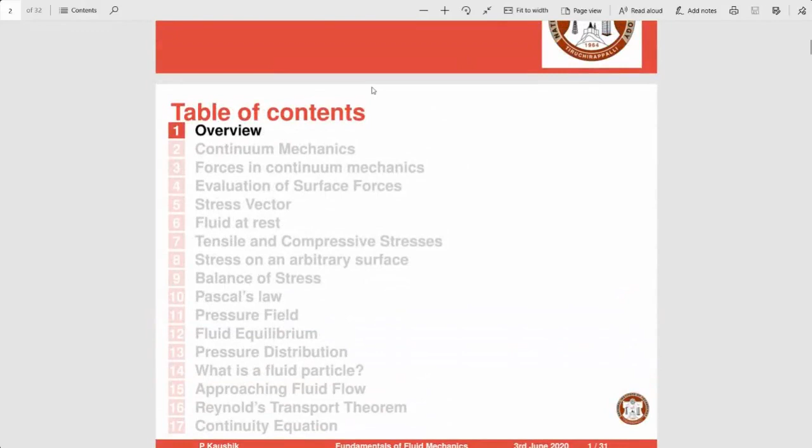Let us start with what is this continuum mechanics. Continuum mechanics is what we normally study as classical mechanics. Continuum is the concept where we assume that the medium or material is a continuous object, and we define everything based on that. There are two parts in continuum mechanics: solid mechanics on one side, and fluid mechanics on the other. Solid mechanics is what mechanical engineers study in terms of strength of materials and subjects like engineering mechanics. Today we will deal with fluid mechanics.

Mechanics in general has two parts: statics and dynamics. This is well known for solid mechanics as well as fluid mechanics. So fluid mechanics has fluid statics and fluid dynamics. Based on these two important parts of fluid mechanics, I thought I will give a brief overview of each, and how mathematically we can go about it with a small example in each case.

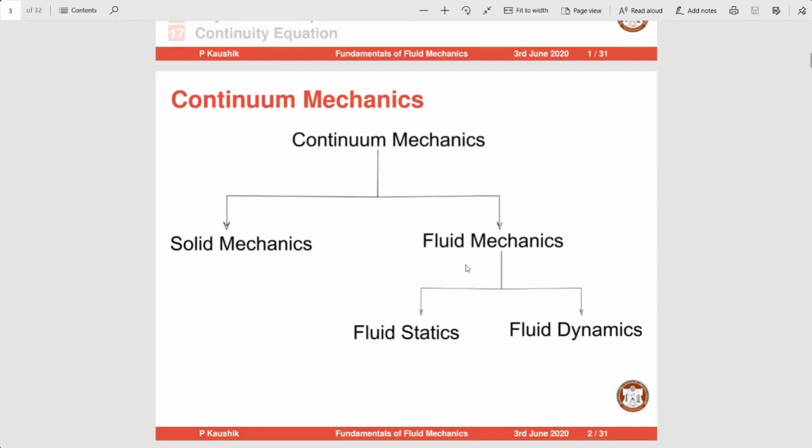Let us see how we can deal with fluid statics. Now when I go into that, you will see there are some equations involved. Don't worry, I will try to explain those equations, and it is not very complex as you may think.

In continuum mechanics, there are two types of forces: one is called surface force, and another is body force. This is true for both solid mechanics and fluid mechanics. This is simple to understand. Surface force, sometimes called contact force, can act either on the bounding surface of the body as a result of mechanical contact with other bodies, or on imaginary internal surfaces.

If you have a continuous body, you can take a section and do a free body diagram, and in that you can have forces on the surface, and that is why it is called surface force. Similarly, there is another type of force which acts from outside the body, on the volume of the body or the bulk of the material, and that is called body force. For example, gravity force acts on a paperweight over its entire mass - volume or mass here we use interchangeably because it is the extent on which this force acts. So these are the two main forces you normally encounter in continuum mechanics.

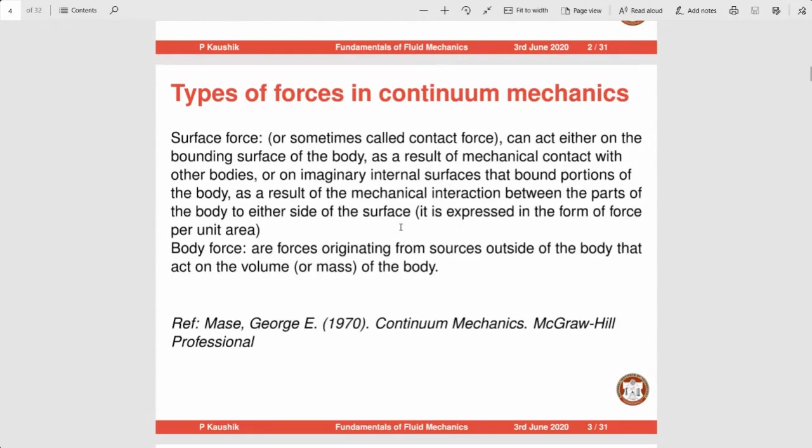Evaluation of surface forces - there are many equations, and a traditional fluid mechanics lecture is very difficult to give in slides. It would be easier on a board, but I try to give some board feel on the slide itself. Suppose you want to evaluate the surface force and you have this body, which I can divide by a section, and at point P I want to find the surface force.

Let us take the free body diagram and put it on the right side. At point P there is a surface force delta Fs which acts on 1 because of 2, so that is why Fs12, and the dash over it means it's a vector - force is always a vector - and this surface has an area delta Ax. The coordinate system is chosen so you have x and y directions, with unit vectors i and j. So we can write Fs12 as delta Fsx i plus delta Fsy j. This is how you give the two components, shown here in the dashed line.

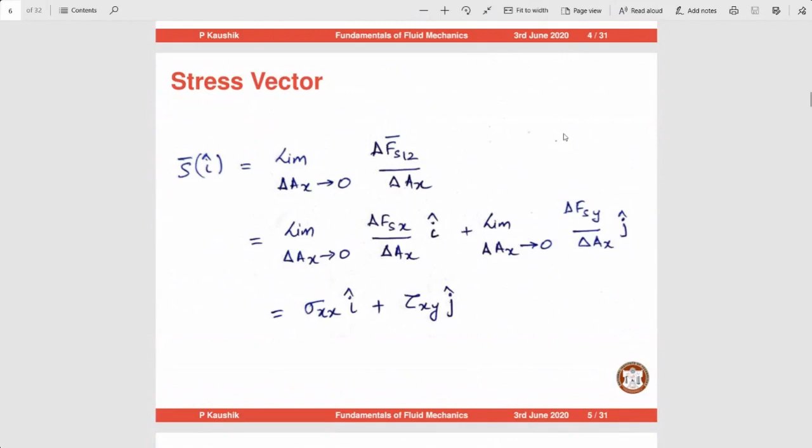So if we write the stress vector in the ith direction, Si, we can write it as limit delta Ax tends to 0, delta Fs12 divided by delta Ax. So Ax is the area on which it acts, and we want to bring it down to a single point. That way we define the stress at each individual point, and if we integrate it over all the points, we get the entire stress force. That is why we bring it down to one point.

So limit delta Ax tends to 0, delta Fs12 by delta Ax is how we define it. Again, delta Fs12 we can split into two parts: one is the x part and the y part. That is what we are doing in the next step.

So the x component we write as sigma xx, and the y component we write as tau xy. This tau xy is written such that the first letter, x, is the direction of the outward normal of the plane on which this force is acting. Stress has to be defined based on the force direction and the direction of the plane. So the plane on which it is acting is the x plane, that is the outward normal of the plane, and the direction it is acting is the y direction.

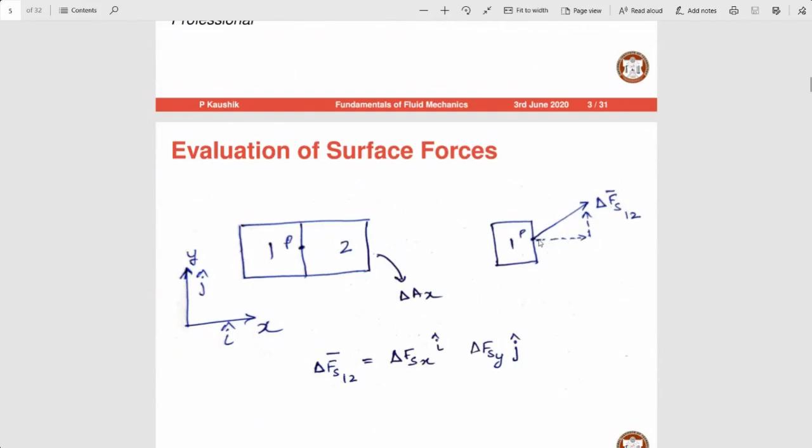So if you see in the previous slide, Fsy is in the y direction, so you see the components. And the xx is in the x direction, so it is acting in the x direction along the x direction plane, that is why xx. So this is how we get the stress vector, as components of the regular stresses sigma xx and tau xy. This is for a 2D case. You can definitely do this for a 3D case, it is not difficult, just a simple extension of what you have here.

So once we have this, we can get the stress vector of a fluid at rest. If you have these two free bodies, 1 and 2, the stress given or acting on 1 because of 2, if given as sigma xx, then the stress acting on 2 because of 1 will also be sigma xx, because of Newton's third law. Since these two are equal, we can write the stress I as sigma xxi, and the stress vector of minus I as minus sigma xxi, which is minus of S i.

So this gives you the sign convention of the stress vector, how it will be in each direction. This is common for even fluid mechanics and solid mechanics. Till now we have not especially talked about fluid mechanics, we have just taken a body and split these stresses. We will go to the concept of a fluid after a couple of slides. Anyway, we will discuss tensile and compressive stresses, these are all well known actually, for whether it is solid or fluid, this is true.

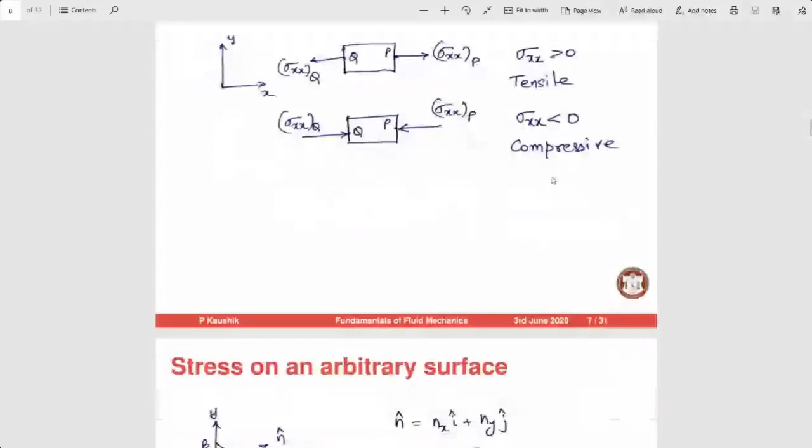So how do you find stress on an arbitrary surface? This is the next thing we'll discuss. We know there are regular stresses, sigma xx, tau xy, etc. So on an arbitrary surface, how will we find the stress? Let us take a wedge, the wedge is like this, OAB. OA is along the x direction and OB is along the y direction, and AB is the unknown direction, which is at an angle theta with the x-axis.

And the unit outward normal is n. So I can write this n vector as nx i plus ny j, the two components in the x and y direction. So nx we can write as sine theta, ny is cos theta. Here, because this is a unit vector, the magnitude is 1, so that I've shown in the bottom line, where n magnitude is 1.

So if sigma xx is acting on OB, then sigma yy will act on OA. That is what we see in this free body diagram. And this unknown sigma nn is acting on AB.

So what is the relationship between these? If I say that the fluid is at rest, this OAB is at rest, then the net force acting on this will be 0. If it is 0, then each component, sigma fx, will be 0 and sigma fy also will be 0. So the x component, if it becomes 0, we get minus sigma xx Ax plus sigma nn An sin theta equal to 0. So this is what we get.

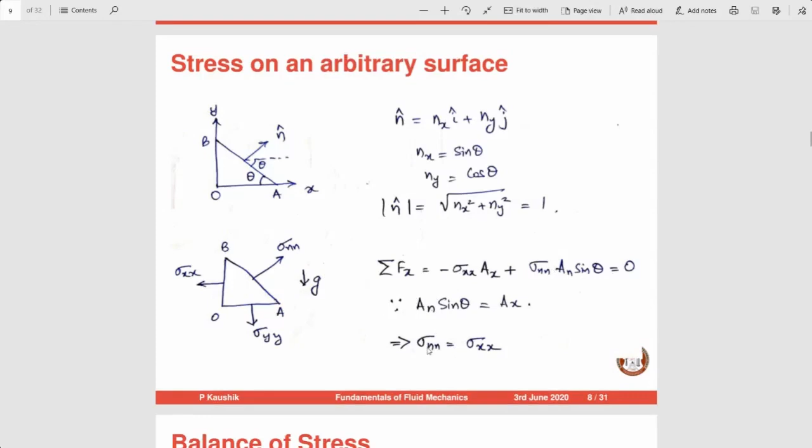And we know that An sin theta is Ax, because from the geometry itself we can make out that An sin theta is Ax. Once we get that, we can divide the entire equation by Ax and we get sigma Nn equal to sigma Xx.

Then balance of forces in the y direction. How do we balance the force in the y direction? Similarly, we can do this. But here you have to remember, in the y direction there is a gravity force acting. Apart from the surface force, there's a body force which is in the y direction. Normally we take gravity in the downward direction, so here I'm assuming gravity is there only in this y direction.

So the sum of the forces in the y direction can be written as sigma Nn An cos theta minus sigma Yy Ay minus mg. M is nothing but the mass of this body OAB into g, that is the force. And the net force is 0 because it is at rest. Remember that the sigma Nn component along the y direction will be the positive y direction, whereas sigma Yy and mg will be in the downward direction, that is negative. So that is why this plus and minus sign come.

This is from classical mechanics, so we are not doing anything very complex. Only thing now we are writing m, instead of writing it as m which we do in solid mechanics, here we are writing it as density into volume, rho into v. So again, An cos theta is Ay, because that is from geometry. So you can get sigma Nn plus equal to sigma Yy plus rho g v by An.

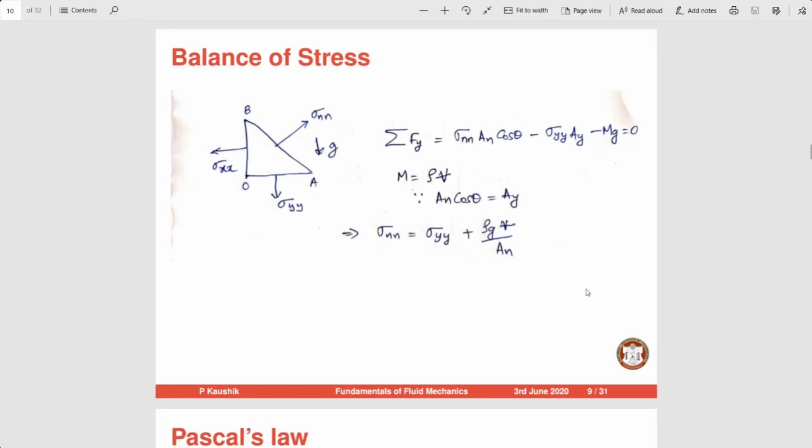So obviously this OAB is a finite sized thing, so it is not just a point. So we have to bring it down to just a point. So how we do that is, when you make it smaller and smaller, I'm showing this with dashed lines of this wedge. So the angle still remains the same, only the size reduces. So in the limit, the volume tends to 0.

That means the surface area also will tend to 0. But limit volume by surface area, will it tend to 0 or not? That is the question. So if volume is tending to 0 and surface area also is tending to 0, which will tend to 0 faster?

It will be the volume, because the volume is of the third power, whereas surface area is of second power. Suppose you have the surface area as 1 and volume as 1 cube. If the length is 1, then area is 1 square and volume is 1 cube. If you reduce the length to 0.1, the volume will be 0.1 cube and area will be 0.1 square. So 0.1 cube will be 10 power minus 3, whereas 0.1 square will be 10 power minus 2. So if you keep reducing it, volume will go down faster to 0 as compared to area.

So therefore, limit V by An tending to 0 means the volume will go faster, and therefore that value will become 0. Therefore, when you bring it down to a single point, we can write that sigma Nn equal to sigma Yy. So sigma Nn equal to sigma xx equal to sigma yy equal to sigma zz. If you want, you can do it in the z direction and add sigma zz equal to minus p. This is true when all taus are 0.

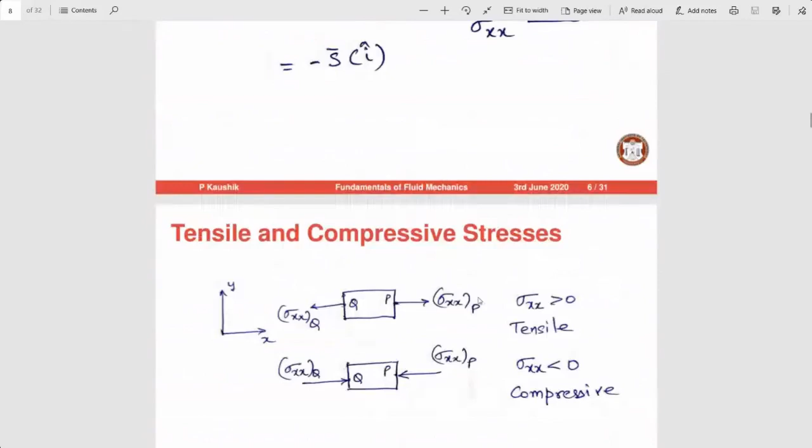So here we have the stress as sigma xx plus tau xy, sigma xx i plus tau xy j. Here I removed the tau, and without tau I proceeded. Why I removed tau is because here I am writing the stress vector of a fluid at rest. This 'at rest' is very important.

So this is where your definition of fluid comes. Fluid is defined in such a way that if there is a shear stress within the fluid, it cannot resist it. So it will continuously deform when there is a shear stress. If it is deforming, that means fluid is not at rest. So if fluid is at rest, that means there cannot be any shear stress. So that is why this tau xy part has not been taken here, and that is how we were able to come up with this analysis.

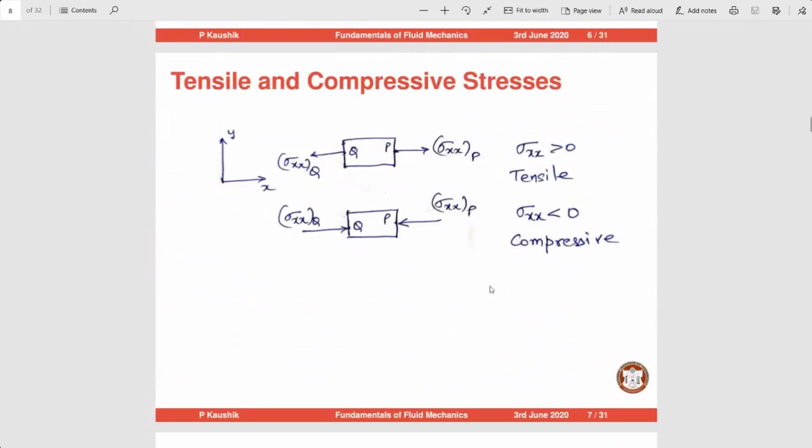So for a fluid at rest, there is no tau. Therefore, we are getting sigma nn equal to sigma xx equal to sigma yy equal to sigma zz equal to minus p, since all tau are 0. If tau are not 0, then this is not true. So that is why there is a distinction between fluid statics and fluid dynamics. This is the static part. So this is how the fluid is defined, and that is how probably I explain to students.

Students will say there are many things. Normally the student comes into the second year, just one year after high school. So they will say the definition of fluid in many ways, like molecular forces, molecules are more far spread apart as compared to solids, etc. Something which they have learned in high school. But from an engineering point of view, fluid has to be defined such that shear stress cannot be resisted by a fluid. So it will continuously deform on application of shear stress.

And with that, if the fluid is at rest, there is no shear stress, and therefore Pascal's law holds good. So if there is a shear stress, then the fluid will start deforming, and the fluid is no more static; it is dynamic. That is how we can distinguish the two parts of fluid mechanics, statics and dynamics, and how we define the fluid, and based on the definition, what we get as the consequence.

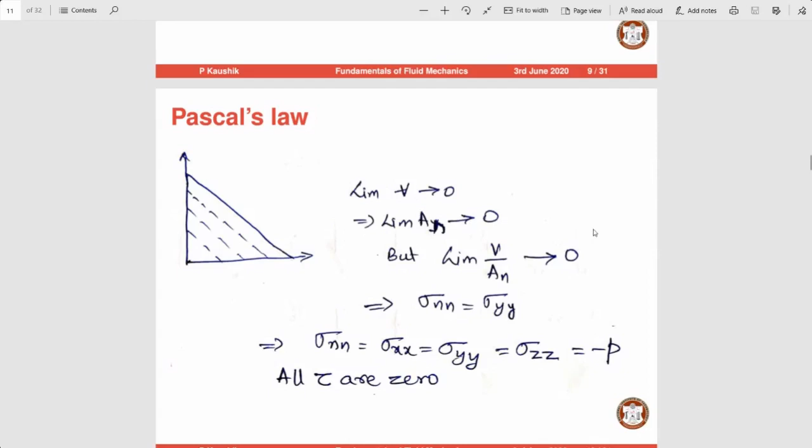Now that this part is very clear, you can actually look at it from very different angles. But this is one of the very easy ways to explain to a student that static fluid will not have shear stress because it cannot resist shear stress. Okay, so once we understand that, let us go to a little higher step.

Then what is a pressure field? So in a static fluid, we said the forces acting are 0. So the sum of these forces should be 0 because it is at equilibrium and it is not moving. So the surface force plus body force net should be 0. Now we said that the pressure acting at a point is all equal in all directions.

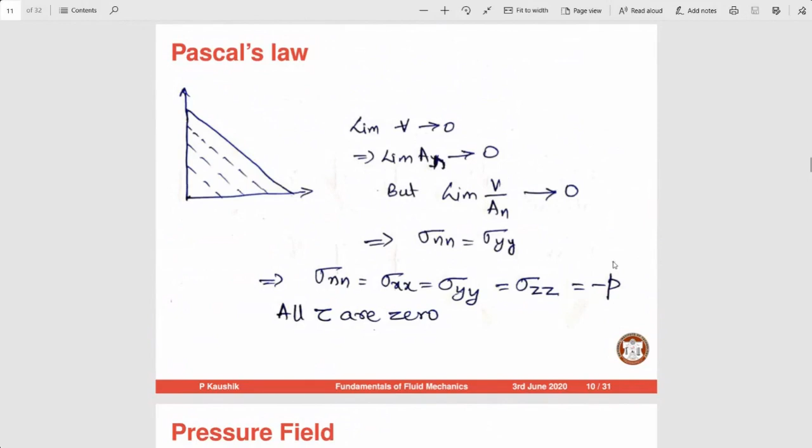Okay, so that is the pressure. So pressure we give as minus P because pressure is generally compressive, and the sigmas are usually for tensile, so that is why it is a minus sign. It's just a sign convention. It is not some magic sign that has come in here.

So once we understand that fluid is static, we can write the net surface force on this finitely sized body. Remember, this L and R are not the same point; now they are two different points. In the wedge, we got it down to a single point. If you bring it down to a single point, PL and PR should be the same because the pressure has to be the same in all directions at a particular point. But fluid is still at rest, while the pressures are not equal at different points.

So now, what is the net force that is acting in the x direction? That is PL minus PR into AX. This is the net force acting on this body.

So what is PL? PL, you can write it as P of XL, YL, ZL. This is where the definition of pressure field comes. Pressure field is a way of expressing this quantity. Any quantity can be expressed as a field. If you know the value at different points in a fixed region at different times, you can call it a field, like the electric force at different points in a zone, or the velocity at different points in a fixed region in space. So x, y, z are the coordinates in space, and time is the time at which we are considering the value.

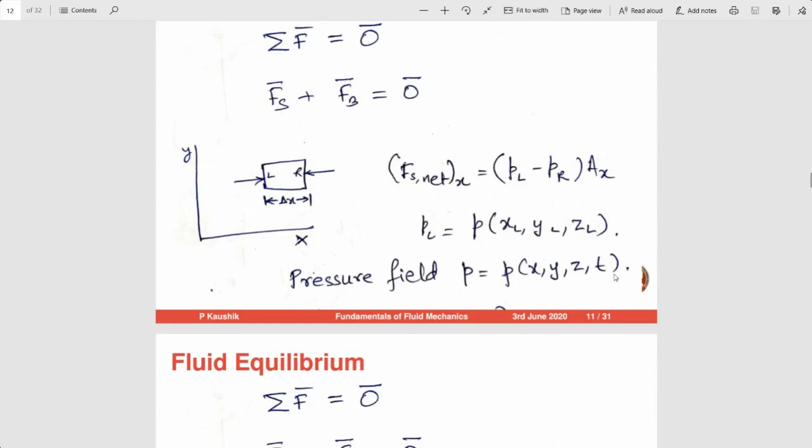So PL, we can write it as this. Here I am not taking into account the time, because it is just a simple thing - you can add it if you want. But for now, we are just taking it as PL is P of XL, YL, ZL. Once we understand that PL is P of XL, YL, ZL, we can write the fluid equilibrium like this.

So PR, okay, R is delta X from L, and other coordinates are same - Y and Z coordinates are same. So PR, I can write it as P of XL plus delta X, YL, ZL.

Once we are able to do this, if the element we consider is quite small, then we can expand that PR in terms of PL using the Taylor series, which we are writing in the next line. This is a mathematical way of representing some quantity in a field by another quantity nearby it, which depends on delta X. These dot dot dot dot are higher order terms, which will become small if delta X is small. So the next higher order term will be delta X squared, delta X cubed, and so on.

So now what we can do is this PR - P of XL, YL, ZL is nothing but PL. So PR equal to PL plus del P by del X into delta X plus so on. So PL minus PR is minus del P by del X into delta X. We're just rearranging the equation and neglecting the dot dot dots, which are the higher order terms, for a small distance delta X.

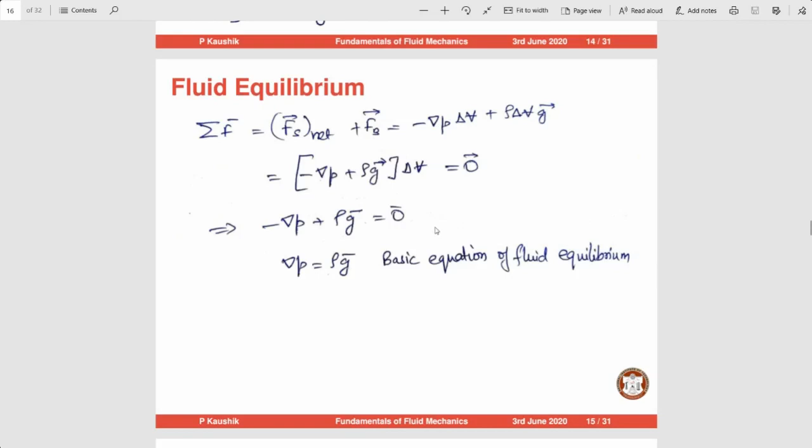Let us see one example, maybe not a problem, but an example of how we resolve it, say the gravity force is in the z direction. So we say that, okay, let us assume that gravity force has three components in the x, y, and z direction. It is just an arbitrarily oriented control volume coordinate system. So grad P equal to rho G.

So del P del X, I can write it as, here rho we take to be a constant. Grad P is rho G means this grad P has three components: del P del X times i, del P del Y times j, del P del Z times k. And G has three components. So we can equate the components: del P del X is rho Gx, del P del Y is rho Gy, and del P del Z is rho Gz. We are just equating the components of a vector like we used to do in mathematics.

Once we do that, del P del X is equal to rho Gx. So I can just integrate this equation. If I integrate that, I get P equal to rho Gx plus some function of y and z. If we partially differentiate this quantity, we will get back that del P by del X equal to rho Gx.

So this P, if I differentiate in terms of y rather than x, I should get del P by del Y equal to rho Gy. So what is del P by del Y? The rho Gx term cannot be differentiated with respect to y, it will go to 0. Therefore, we get partial derivative of f1 with respect to y is equal to rho Gy. So now we can get f1 by integrating this rho Gy. So f1 equal to rho Gy plus f2 of z, because when you partially differentiate with respect to y, we will get back the previous equation. Of course x cannot be there because x has already been taken care of in the earlier integration itself.

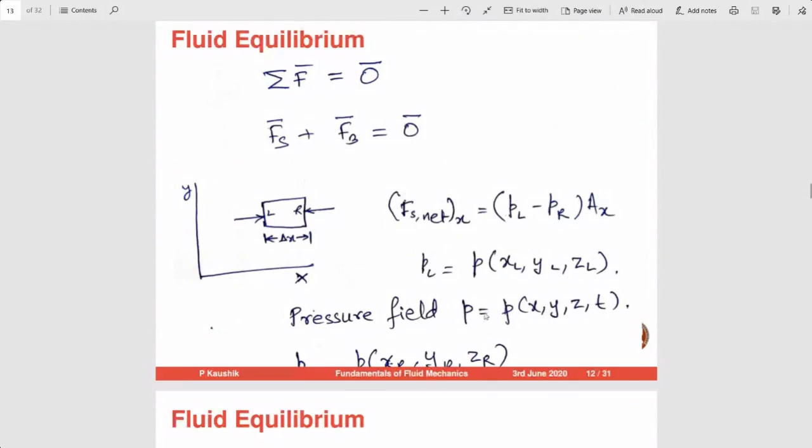So there is another way of seeing this. Remember, in our pressure field, P is nothing but P of x, y, z, and t. So I can write dP. So if I forget the t, just x, y, z, I can write dP, the full derivative of P, as

del P del x dx plus del P del y dy plus del P del z dz. This is based on the calculus, from simple mathematics which we study in our first year of engineering. Once we have this, you know that del P by del x is nothing but rho gx, del P by del y is nothing but rho gy, and del P by del z is rho gz. So since rho g etc are constants, I can take the d out and write

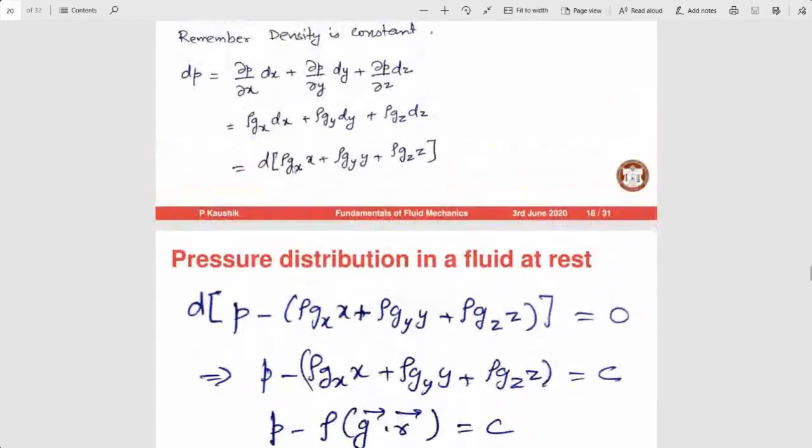as d of rho gx x, rho gy y, and rho gz z. And this I can take to one side and write it as d of p minus rho gx x plus rho gy y plus rho gz z. This is equal to 0. Right? So once we have that, we can integrate on both sides. So integral of d is nothing but a constant on the other side. So p minus rho gx x plus rho gy y plus rho gz z is equal to c, which is a constant.

So this gx x plus gy y plus gz z, I can write this as g dot r. So g, we know the vector, that is gx i plus gy j plus gz k. And r is nothing but x i plus y j plus z k. R is the direction vector of any point at which we want to evaluate this. So that way we can find what is the change in pressure. So pressure at a point we can write as rho g dot r plus c.

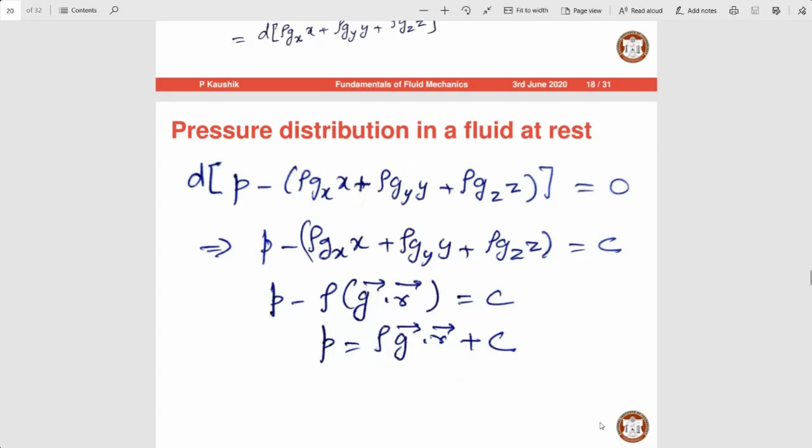Now, pressure distribution in a fluid at rest. Let us take a particular case where g acts in the negative z direction. If g is acting in the negative z direction, then what do we get? So we can write g as minus g k. Other components gx and gy will be 0. So gz is, I write as g, and g k. So we get p as minus rho g dot r.

So g dot r, since gx, gy are 0, you only get gz into z. So which is minus rho g z plus c. This is true when fluid is at rest, density is constant, and gravity is in the z direction. So with this we can evaluate. Let us say if at z equal to 0, pressure is 0, then c will be 0. If at z equal to 1, it is atmospheric pressure, then you have to write c as atmospheric pressure plus rho g something. So this equation can be easily used to find the pressure distribution in the fluid at rest. This is how we actually deal with the statics of a fluid.

So in the statics of a fluid, we must always remember that the tau values are always 0. The shear stresses cannot exist. If it exists, the fluid cannot be static. So that is a very important consequence or concept that you have to understand. And based on that, we can do any sort of manipulation, any sort of derivation, knowing that truth that fluid at rest cannot resist any shear stress.

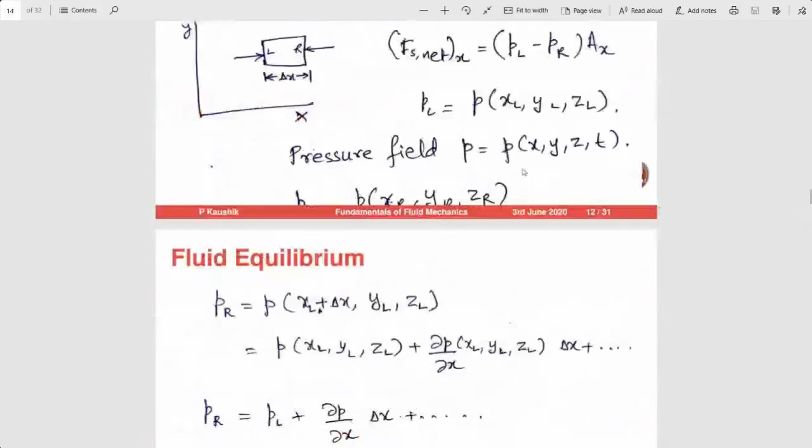So this is the part that I wanted to talk about in statics. So main definition of a fluid, how much it influences how we analyze a fluid is so important, because just by defining that fluid is at rest and it cannot resist shear stress, this tau part is completely gone. And we directly, without the tau, we directly do our simplification and further processing of the entire fluid at rest.

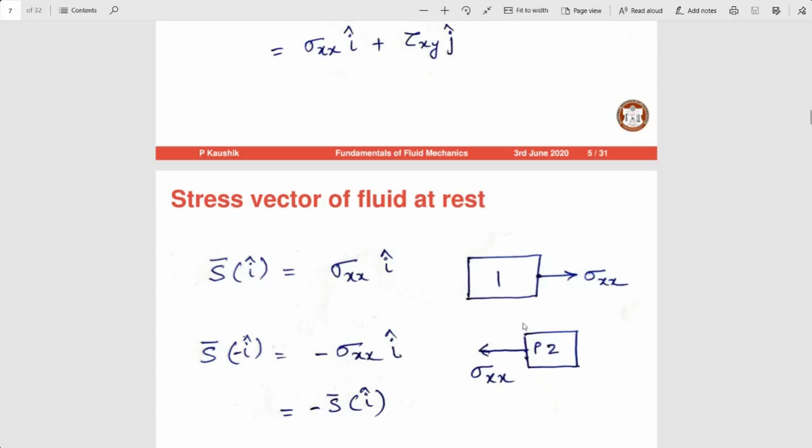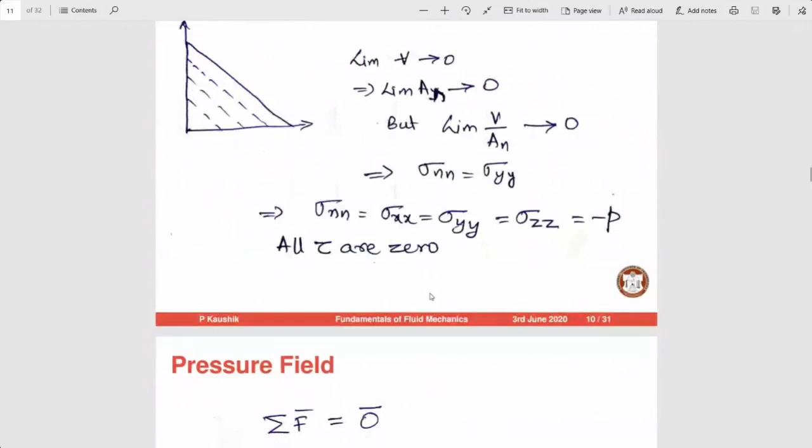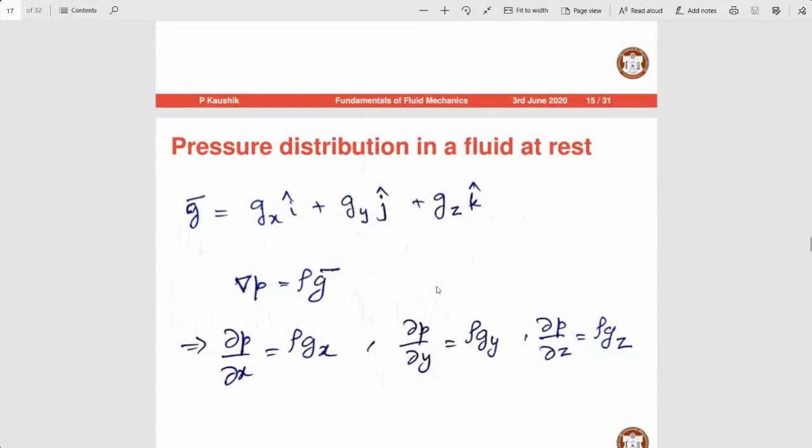So in our fluid mechanics, normally fluid at rest is one of the very first few topics that we define. First we define what is a fluid and some of the properties of the fluid, and then directly we go to this fluid at rest, and we derive the Pascal's law, etc. So we derived the Pascal's law, and we showed that this is a very important consequence, that tau xy has to be 0 for a fluid at rest, and only then the remaining things are true. Now if we have to discuss the fluid in motion, then what should we do?

Normally, in our high school, the students talk a lot about this projectile. Projectile motion is very seriously discussed in both physics, mathematics, etc. I am not sure about many state boards, but definitely in central boards and many standard boards.

In India, the projectile motion is discussed. In high school, the teachers will explain that a projectile is like a stone that you throw, and how it moves and what path it follows, and that is called the trajectory. So we are always accustomed to this understanding of mechanics in terms of particles, like rigid body, particle. These are some of the terms very commonly used for mechanics in high school.

So rigid body, particle, we understand. But when we have to do this analysis for a fluid, at rest it is fine. But when it starts moving, what is moving? The fluid. Whether the fluid is like a bulk moving, or whether it's like particles which are moving. So many things.

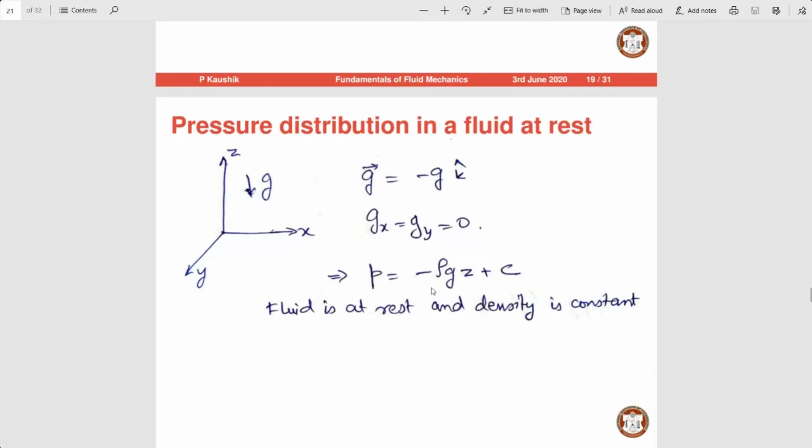The molecules of fluid are of course moving, but we are not going into the molecular approach. So in our continuum mechanics, classical fluid mechanics and classical continuum mechanics, we take the fluid to be a continuum. So when it is taken as a continuum, yet there is something called the fluid particle concept which is introduced, and most students are always confused about this concept. So let us see what this concept is. Concept of a fluid particle.

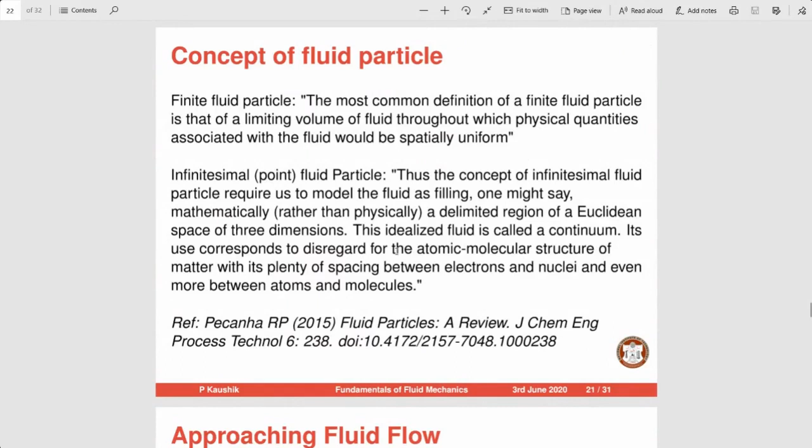This I have taken from a journal paper, so I am directly quoting from it. The most common definition of a finite fluid particle is that of a limiting volume of fluid throughout which physical quantities associated with fluid will be spatially uniform.

So now, when we say fluid particle, especially in kinematics, we say that the fluid is translating, it is deforming. If it is deforming, that means it is a finite size thing. A point size thing will not deform, isn't it? So how is that particle, whether it is finite or whether it is just a point?

The concept of a fluid particle is that it is a finite fluid particle in terms of physical quantities being the same. That means within the fluid particle, you will not see the density changing or any other quantity changing. It is spatially uniform. That is the concept of a fluid particle in terms of finite fluid particle.

At the same time, fluid can also be seen like an infinitesimal point fluid particle. It is like how we see whether something is a particle or a wave - the dual nature of matter in physics. Similarly, we use this infinitesimal or point fluid particle also.

The concept of infinitesimal fluid particle requires us to model the fluid as filling, one might say mathematically rather than physically, a delimited region of Euclidean space of 3 dimensions. This idealized fluid is called a continuum. Its use corresponds to the disregard for atomic molecular structure of matter, with its plenty of spacing between electrons and nuclei, and even more between atoms and molecules.

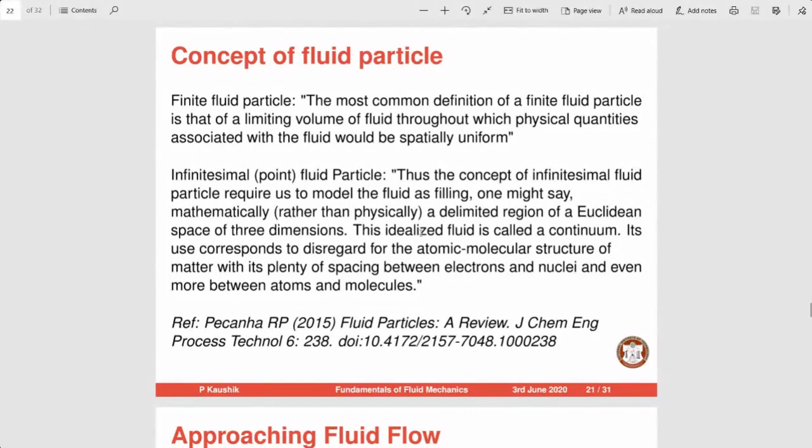Next, when we study fluid flow, there are two approaches. This is a very common thing, and it has to be explained from the very beginning when we start fluid mechanics to students: the Lagrangian and the Eulerian approach. The Lagrangian approach is very straightforward, and most students understand it clearly, especially after doing a lot of mechanics in high school. So they directly understand this.

Like projectile motion, you just throw the stone and observe the movement of the stone, and that is the Lagrangian approach. So an individual fluid particle as it moves through space and time. This can be visualized as sitting in a boat and drifting down a river, where you observe each and every particle in space and time.

The Eulerian approach is different. That is what we have to clearly introduce when you teach fluid mechanics, because this is something that students don't do. The Eulerian approach is the way of looking at fluid motion that focuses on specific locations in space through which fluid flows as time passes. So you are looking at the flow in a particular zone or particular region in space.

If they don't understand this, they will never understand the concept of steady state. Because in steady state, you still have velocity. That means if velocity is there, it is moving. Then what is the meaning of steady state? It is not changing with respect to time. That means in the field, view, or zone which you are concentrating on, the velocities are not changing with respect to time. This can be visualized by sitting on a bank of a river and watching the river pass a fixed location.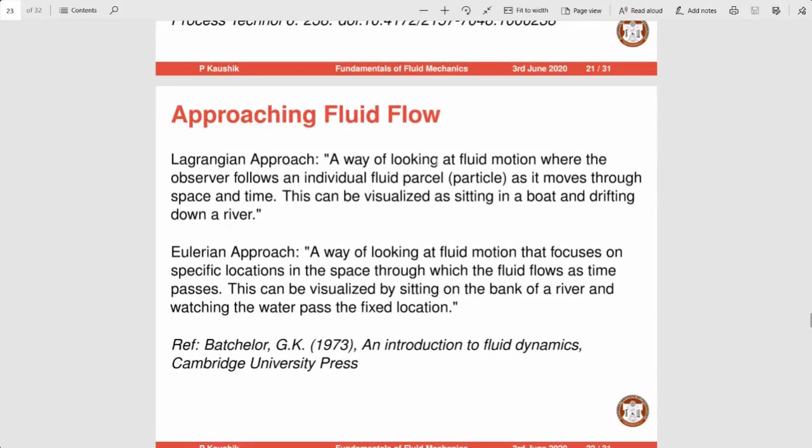So Lagrangian and Eulerian - without this clear understanding, it may be almost impossible to understand fluid mechanics clearly. Now, once you explain this for fluid dynamics, it is very important to go to the next step: explaining the Reynolds transport theorem. Most students will get confused with this, but it's very simple.

To understand this, see, when we studied high school mechanics or first year mechanics, students are always introduced to the flow, the movement of particles, and how the movement of particles is studied is by writing the laws of motion, the Newton's laws of motion for those particles. Our Newton's law, etc., was always written or derived for particles - individual particles or rigid bodies, however you call them.

So how do you write it for the Eulerian approach? It is always written for body motion in the Lagrangian approach. We have to change it to the Eulerian approach, and for that you have something called the Reynolds transport theorem. This is something that is not taught in most universities in our country, but if a student has to clearly understand fluid mechanics, this concept of Reynolds transport theorem is very important.

This is the theorem that helps us convert all the laws which have been written for a Lagrangian point of view to a Eulerian point of view. This is crucial for all students to understand, so let us go through this step by step. It is very simple and one need not worry so much. If you understand it in a very simple way, it makes perfect sense.

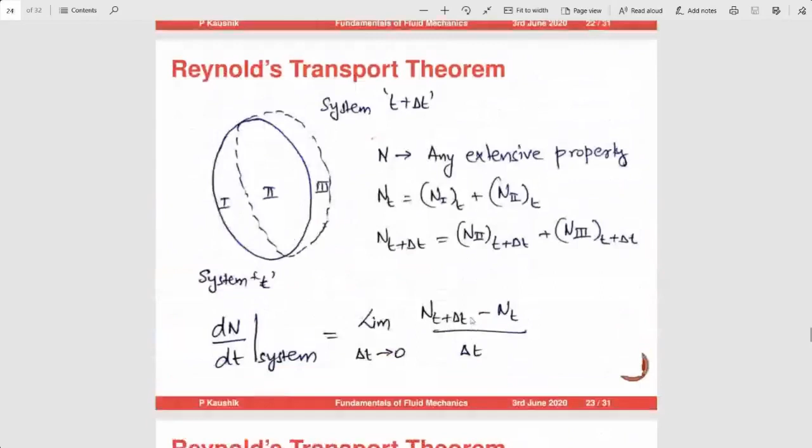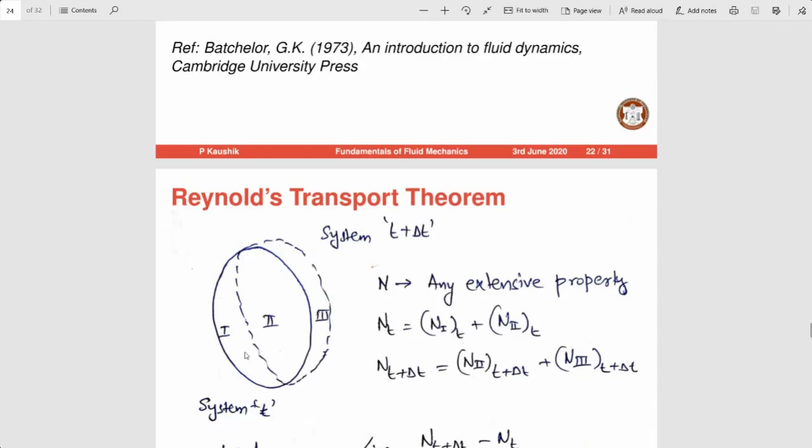Now here we see that when delta t tends to 0, the system tends to the control volume - 2 is like a control volume. When delta t tends to 0, zones 1 and 3 become very, very small, because the dotted line starts almost overlapping with the solid line. So region 2 will be the main region, and 1 and 3 will be very small regions. 1 is like the region going into region 2, and 3 is like the region coming out of region 2. So 2 is like a control volume in which the material in 1 goes in and the material in 3 goes out. When delta t tends to 0, the system tends to this control volume, which is 2.

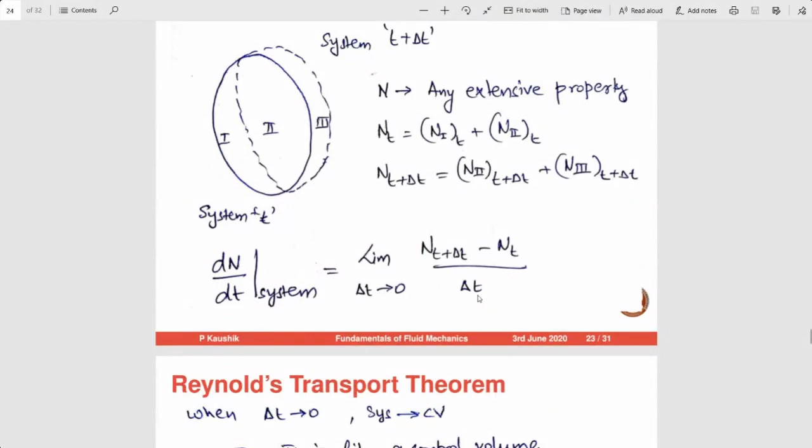This is very important to understand. When this happens, this system and control volume can be interchanged. So we can write dN/dt of the system as the limit delta t tends to 0 of [N(t plus delta t) minus N(t)] by delta t, and I can write it in terms of different zones. For the second zone: limit delta t tends to 0 of [N2(t plus delta t) minus N2(t)] by delta t, plus the rate of outflow minus rate of inflow of the property across the control surface. The control surface is the surface that bounds the control volume. This is a thermodynamic definition, not a very complex thing.

But what is the consequence of this? The consequence is that I have just split these two terms, and on the right hand side I get it in terms of the control volume - so 2 is the control volume. N2 at t plus delta t minus N2 at t means: after a certain time delta t, what is the value of N, and what it was before. If we subtract these two, what we get is the change that has happened in that small time within that control volume of this property.

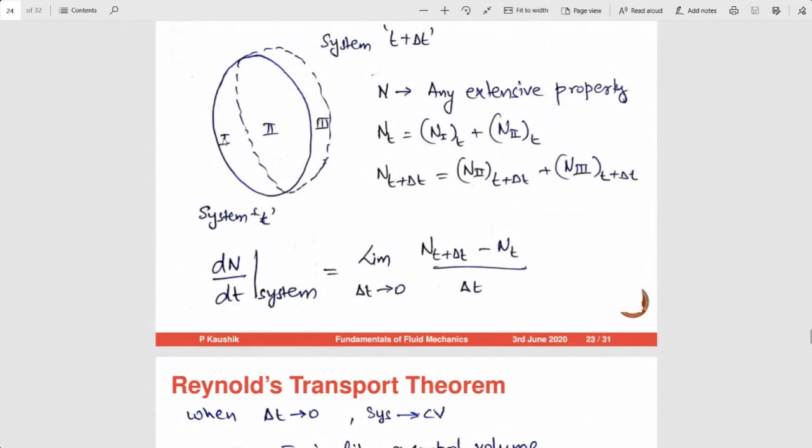Whether it has increased or decreased, we don't know, but it is a change. That is one part. Second, this zone 1 goes into 2, and 2 is going into 3, meaning rate of outflow minus rate of inflow will stay back. So if I give 10 rupees to someone and get 5 rupees back, rate of outflow minus inflow means I'll be at minus 5. I've given 10 rupees but only got 5 back, so that is what remains with me.

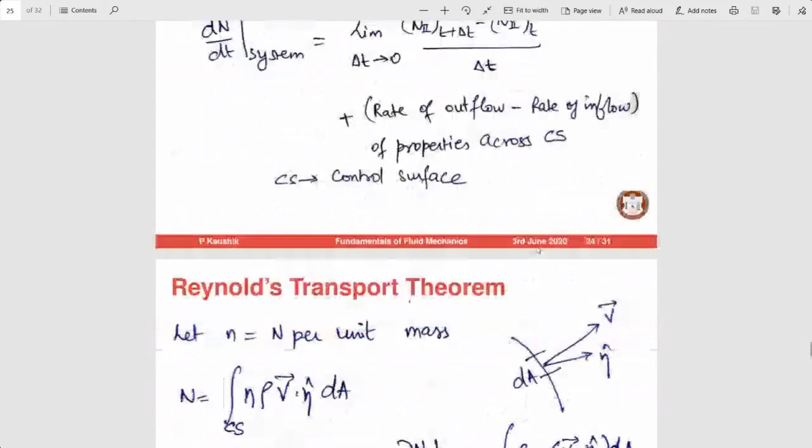So that is what is rate of outflow minus inflow of the property across the control surface. Once we understand this, we have to write what this outflow minus inflow is across the control surface.

So here I have drawn this control surface, an arbitrary imaginary control surface of elemental area dA. Eta cap is the unit outward normal vector to that elemental area, and v is the velocity vector of the fluid going out of the control surface. So v dot eta, if you take the dot product of the outward normal and the velocity vector, you get the velocity component in the outward direction, going out of the surface, in the normal direction.

v dot eta into dA, velocity into area, we know this is the volume flow rate. A1V1, A2V2, we do know. Eta doesn't have any unit as such, it's just a unit vector, so v dot eta dA is nothing but the volume flow rate.

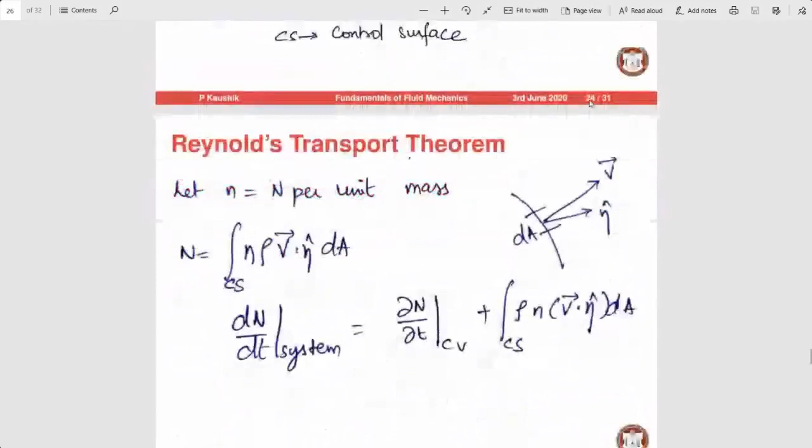The volume flow rate into rho is the mass flow rate, and this small n is the intensive property per unit mass. So the mass flow rate into small n is nothing but the property flow rate, for inflow and outflow. We don't have a different value for inflow and outflow, because if it's inflow, v will be towards the inside, and if it's outflow, v will be towards the outside. When you do the dot product with the outward normal vector eta, it automatically adjusts the sign, whether it's inflow or outflow.

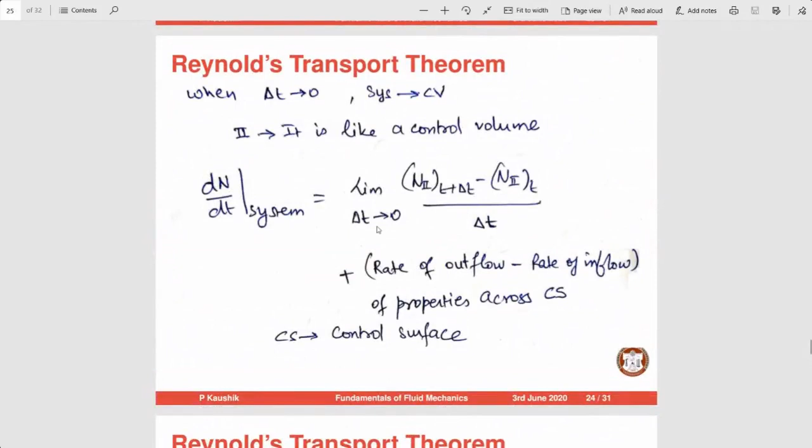So dN by dt for the system, I can write as the limit as delta t tends to 0 of N at t plus delta t minus N at t, by delta t. This I can write as del n del t for the control volume, plus rho into n, v dot eta dA. The rho n v dot eta dA part we have understood.

Why partial derivative, why not full derivative, for del n del t of the control volume? This is a very important question students always ask. It's because when we take the total derivative, we move along with the particle, along the space. Here we are fixing a region in space, we are not moving along the space, we are only at that location. What is the change with respect to time that we are seeing? Therefore it cannot be a full derivative, but rather a partial derivative.

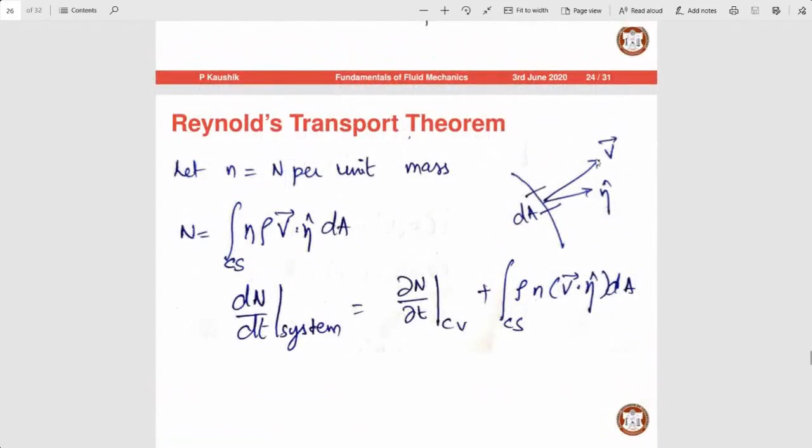If we take the full derivative, just like we wrote dp as del p del x dx, del p del y dy, del p del z dz, we would have to write that if it's moving along space. But because we have fixed the control volume, that is region 2, we have to write it as a partial derivative. So this is your Reynolds Transport Theorem in its simplest form. It is more conceptually strong rather than mathematically complex. Mathematically it is quite simple, conceptually it's a little tricky, but once you understand it, it is very, very straightforward.

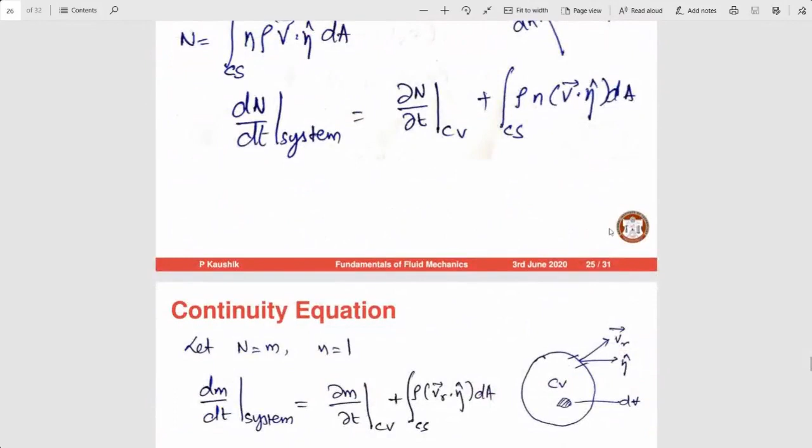So we will apply this for the continuity equation, and once we do that, we will stop.

Why do we need the continuity equation? Let's see. Let n be equal to m, where m is nothing but the mass of the system. So therefore, small n will be m by m, which is 1.

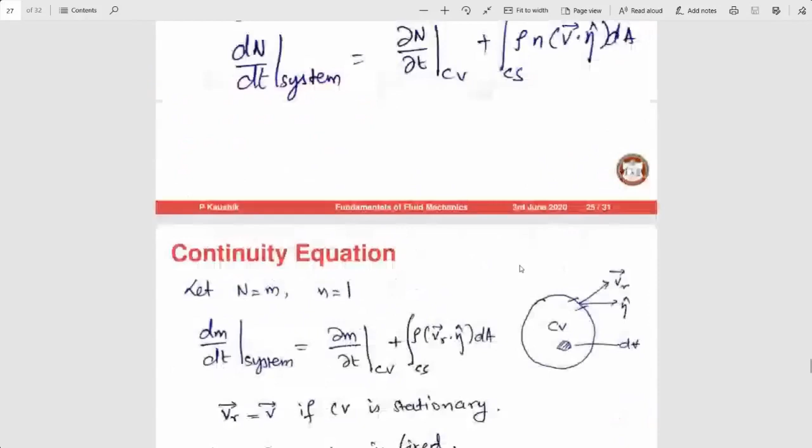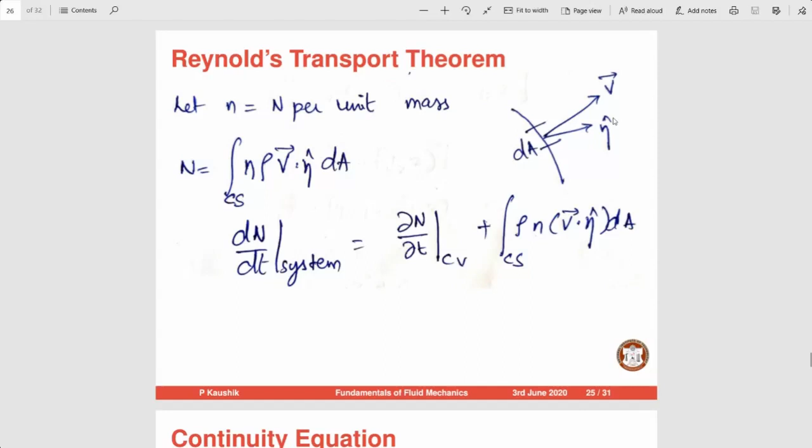So dm by dt of the system equals del m by del t for the control volume plus the integral of rho times vr dot n dA. Vr equals v if the CV is stationary. When we talk about the velocity of fluid going out of the control surface, if the control surface itself is moving, we must take the relative velocity between the fluid and the control surface. So I write Vr as the relative velocity, and Vr equals v if the CV is stationary, which is straightforward since zero CV velocity means no relative velocity except that of the fluid itself. So now, mass of the system is fixed.

What does this mean? From thermodynamics we know that in a control mass system you cannot change the molecules or remove mass. So the mass of a control mass system is fixed and cannot change in any way. So obviously dm by dt for the system is 0, meaning the left hand side is 0. That's why we never use conservation of mass as frequently in solid mechanics, because there's no meaning for it since we've fixed it by definition.

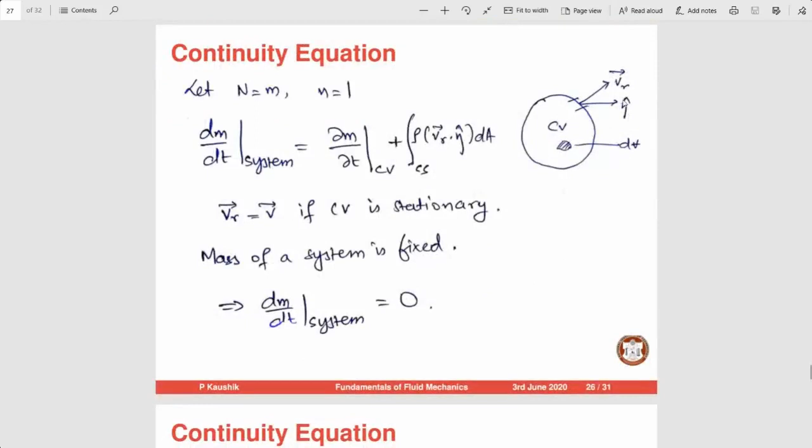So now we set the left hand side to 0. The right hand side is del m by del t for the CV plus the integral of rho v dot eta dA over the control surface. Now m I can write as the integral of rho dV, density integrated over the unit volume, over the entire control volume, giving you the mass. So del m by del t CV I can write as del by del t of the integral of rho dV.

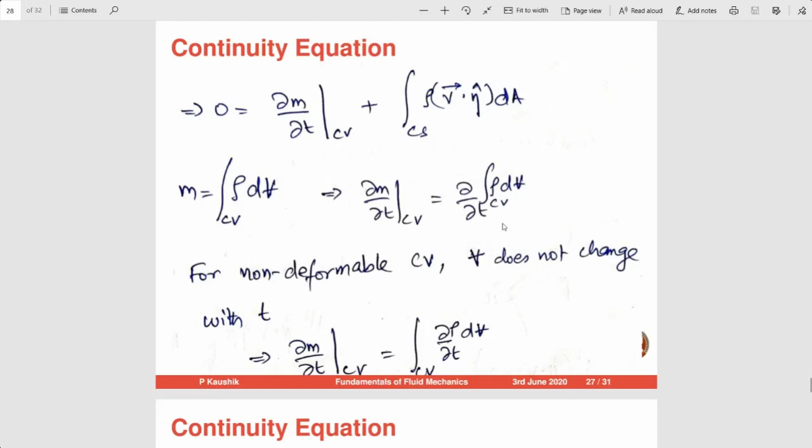For a non-deformable control volume, I can take this derivative inside the integral because V does not change with time. If the volume of the control volume changes with time, I cannot simply move the derivative inside the integration unless I add extra terms to correct for that change of volume with respect to time. But here I am taking the control volume to be non-deformable. So I can write del m by del t CV as the integral over CV of del rho by del t dV.

Similarly, the other term, the surface integral of rho v dot eta dA, I can convert into a volume integral using the Gauss divergence theorem. This is a very common theorem in mathematics normally taught to students—if you're interested, you can look it up in any math book like Kreyszig. So I can use this theorem directly to convert the surface integral to a volume integral involving the divergence of rho v, dV.

So then I can combine the two: 0 equals the integral of del rho by del t dV plus, over the control surface, rho v dot eta dA. Combining these, over the control volume we get del rho by del t dV plus divergence of rho v dV equals 0. You see that the quantity inside the bracket—this is equal to 0—and this, many of you know, is the continuity equation.

Now, if I say the integral of something is 0, does it mean that whatever is inside is 0? That is a very important question. Every time I go to a fluid mechanics class, students ask me, sir, how are you saying the quantity inside is 0 just because the integral is 0? I ask the student in return: how do you know that? How can you say the quantity inside is 0 if the integral is 0? Then I give them another clue to confuse them.

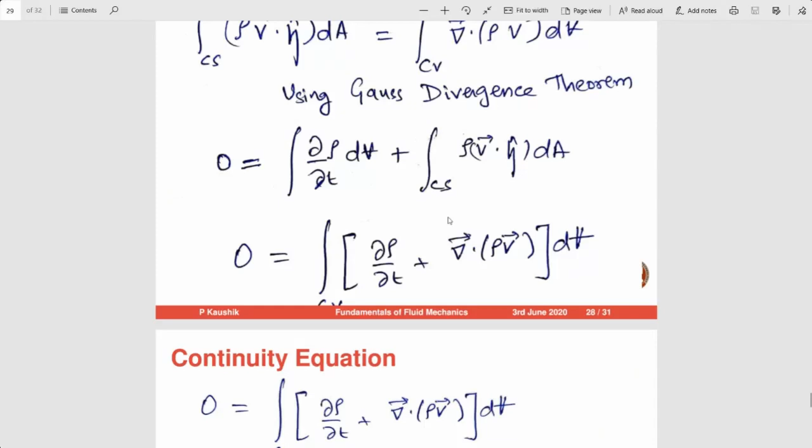Suppose I tell them: take the integral from 0 to 2 pi of sin x dx. Is it 0? So, relating this back to the continuity equation—if I take the integral from minus pi to pi of sin x dx, it is 0. And if I take the integral from 0 to 2 pi of sin x dx, it is also 0. Fine. But what if I integrate from 0 to pi by 2 of sin x dx? Is it 0? The student will say no. But then how can I say the quantity inside is 0?

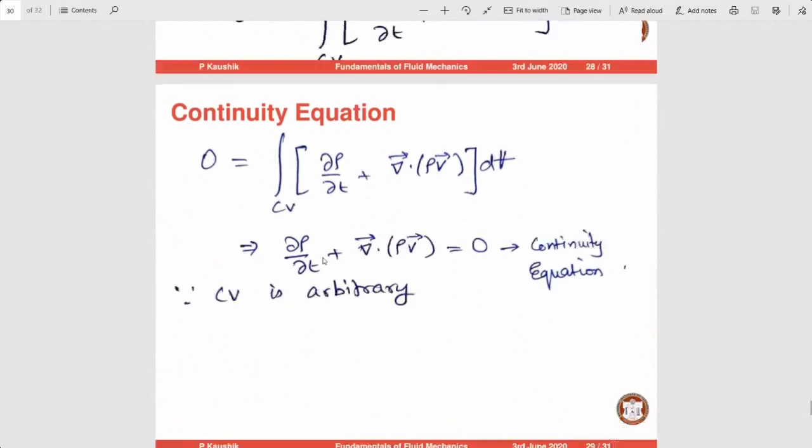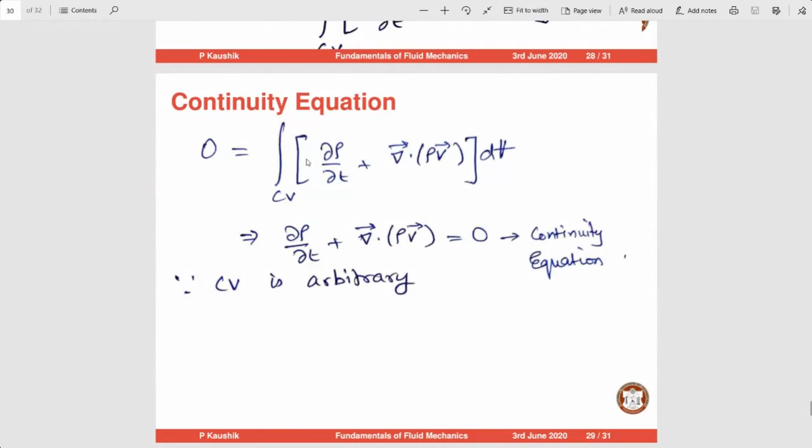So the quantity inside is not 0 because the integral depends on the limits. In this control volume, we have not defined what the control volume is. We don't know—we have not particularly defined whether it is rectangle, square, or triangle. Nothing we have defined. So since this thing itself is arbitrary, a function whose integral is 0 for any arbitrary limits means that function itself is 0. That is how I give that point to explain to the students.

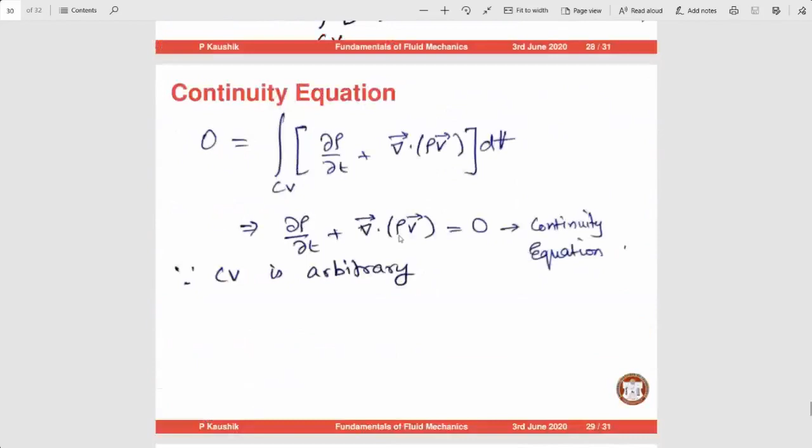Therefore, the quantity inside is 0. It doesn't depend on any limit. If it were depending on a limit, that would mean the inside quantity need not be 0. But here it does not depend on the limit, therefore the inside quantity is 0. So del rho del t plus divergence of rho v is 0. And this is the continuity equation because CV is arbitrary, meaning the limits are arbitrary. We have not fixed any particular thing as the limit.

So this is the way we can use the Reynolds transport theorem to convert Lagrangian view to Eulerian view, and show the continuity equation, because in Lagrangian view we never have something like conservation of mass—we are not bothered about it, because automatically by definition itself it is happening. But here we need to have a conservation of mass specifically, because it is not happening directly. So therefore we have the continuity equation.

Similarly, you can derive the other equations from Lagrangian to Eulerian, like Newton's second law itself—there is the balance of forces or momentum, etc. That becomes a little more complex and tedious. I have actually derived the entire Navier-Stokes equation in the advanced fluid mechanics class, and usually it takes 3 or 4 classes of about 45-50 minutes each to completely derive the entire equation. Usually 1 week or 1.5 weeks goes in just deriving that. But it is an exercise that students seem to enjoy, and as things get clearer and clearer, they are more happy. So it can be done using the Reynolds transport theorem, or it can be done from the first principles also.

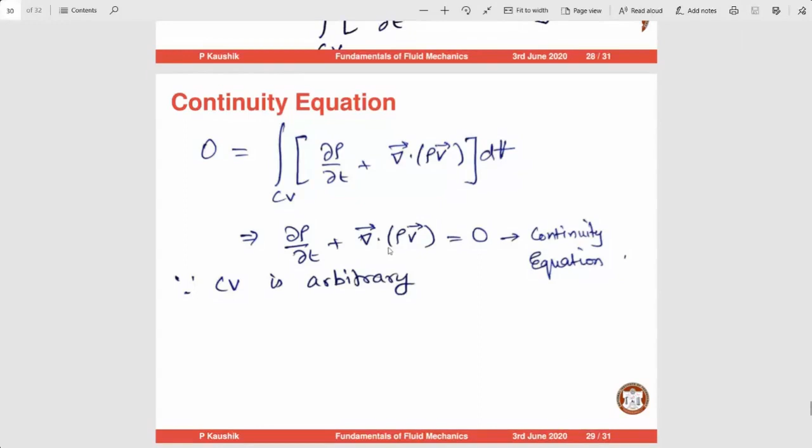So with this, I think I'll stop the example. If you have any queries, we can have a few minutes session of queries. So let me know.

I know it was a very long lecture, and fluid mechanics in the afternoon session is a little difficult.